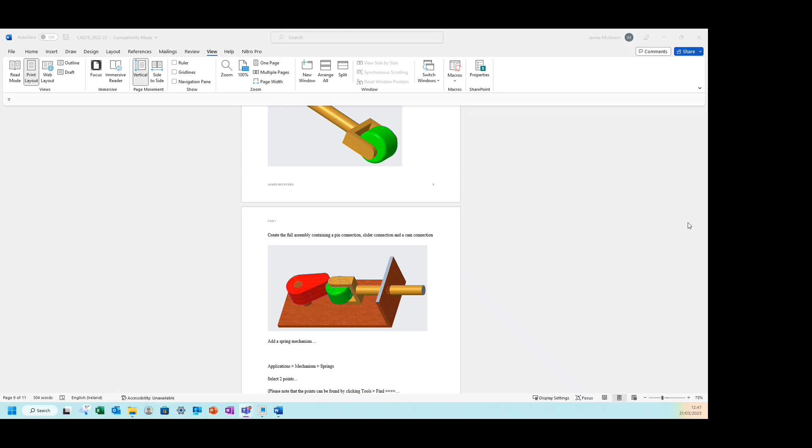Now we have created this device. We've created a pin connection on the cam, a slider connection on the fork and follower subassembly, and a cam connection between the two of them. So all we need to do is add a spring mechanism. So if I go back to the...

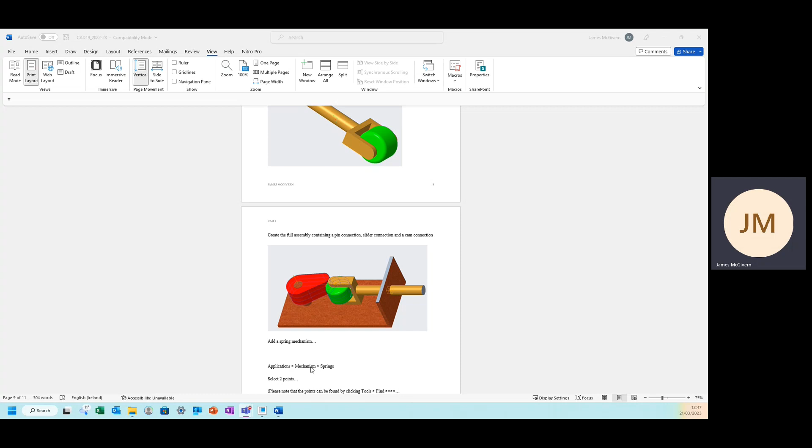Device, the spring is going to fit in here, and the spring is created as a mechanism. So what I need to do before I create a spring is have a start and a finish point for the spring.

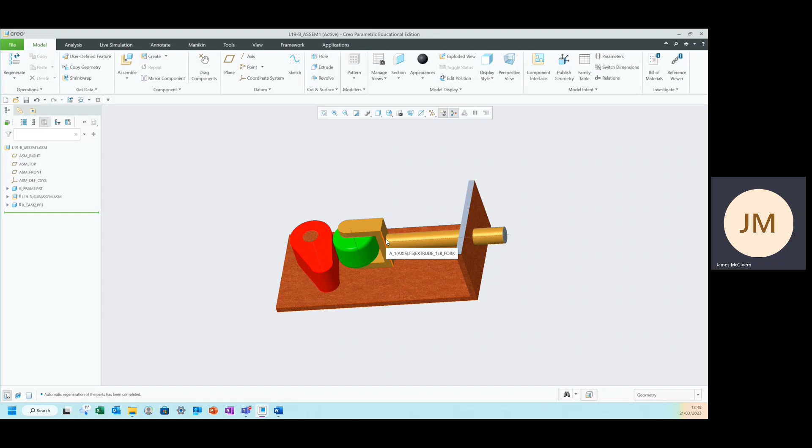The start point is usually a datum point. So I need to have a datum point there on the fork, and a datum point there on the frame around there. So I have the fork open here. I'm going to put the datum point on the axis and fix it off the surface.

I'll select datum point, and I select the axis that I'm going to put it on, and put down the control button, and then I select the surface, and the point should fix itself on the axis and relative to the surface, and that should be okay. So then if I just update that...

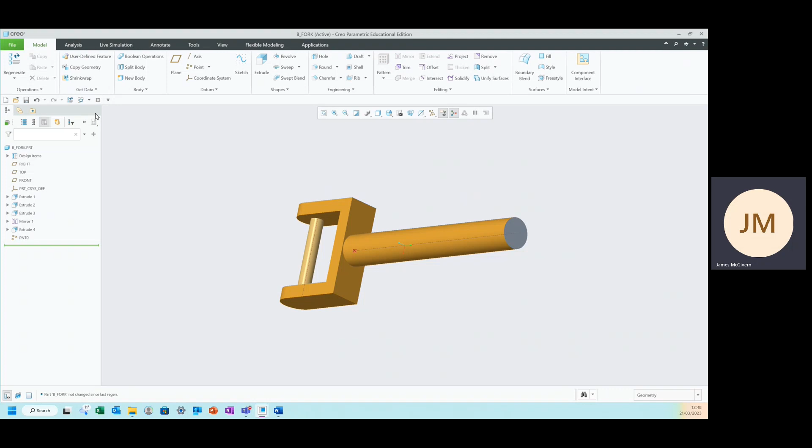Don't forget this, regenerate. Now I'm going to do the same for the frame, so it's going to be over here because the spring is going to finish over here.

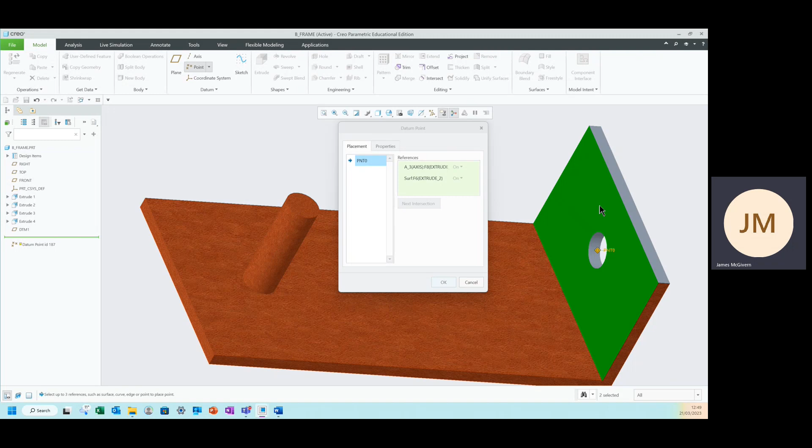So it's a point again, and just drag this over here. I'm going to select the axis there, and control button down and select that surface. It should snap right in the middle of the hole there, and that should be okay.

And then, of course, don't forget to save, regenerate.